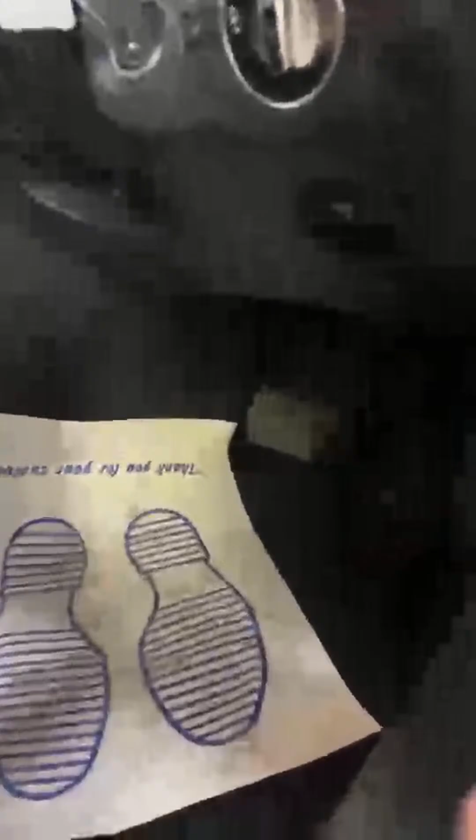Believe it or not, some people may not know how to open the bonnet on their cars. Most Mercedes are the same when it comes to opening the bonnet. I'm here in the UK, so this is a right-hand drive. To open your bonnet you go down here - although you can't see much, you can see this red lever. If you pull that down, it will open your bonnet, and most Mercedes have that, even from a year like 2002, with the same sort of red lever down there.

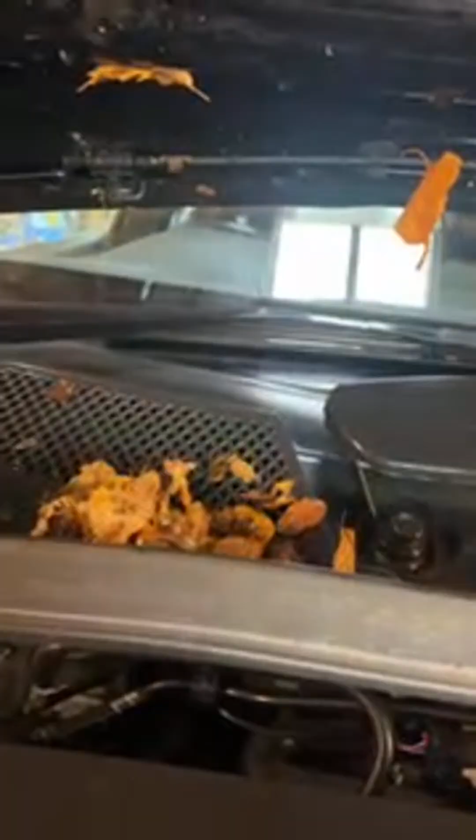Now we can go to our bonnet and check. If you put your fingers through there, there's another lever you need to flick - it's just here. That little yellow lever, you flick it to one side and then open the bonnet, and then you have the strut which you need to lift to hold the bonnet open. I'm just going to do that now. There's the strut - you have the yellow coloring there, so that's where it goes. When you put your fingers through here, that's the bit you open.

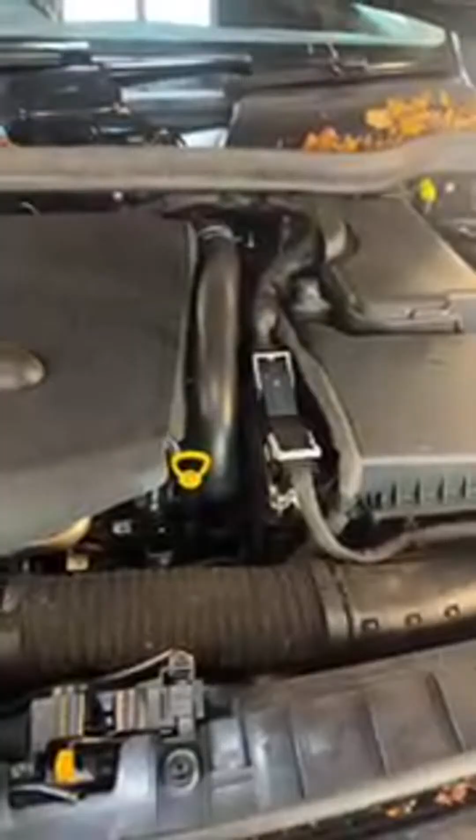It's kind of nicely color coded, and as soon as you open that, you can notice this yellow thing here - that's the dipstick, and that's how we're going to be checking the oil. So what does the manual say? It says make sure the car is on a level surface and preferably cold, because that way all the oil would have gone down overnight or over a few hours. If you have been driving the car, you can leave it parked for a few hours and then come check your oil. Not the end of the world, but preferably when it's cold.

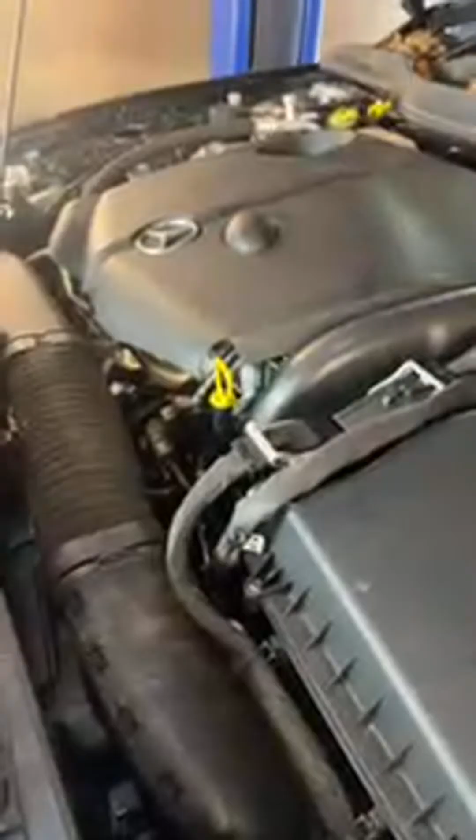So let's try and check this. I'm just going to show you the manual.

So here's the manual. It shows two models: this is for the petrol engines and this is for the diesel.

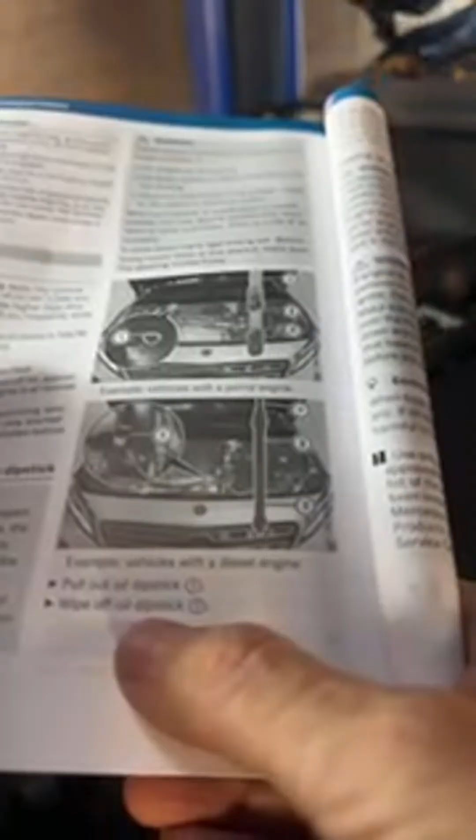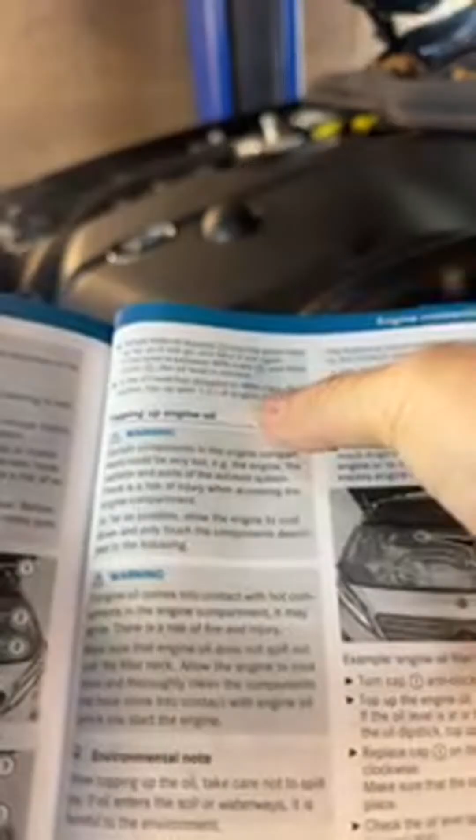The instructions say pull out the oil dipstick, wipe it off, and slowly slide it into the guide tube as far as it will go, then take it out again. If the level is between minimum mark 3 and maximum mark 2, the oil level is correct. So we have the minimum mark.

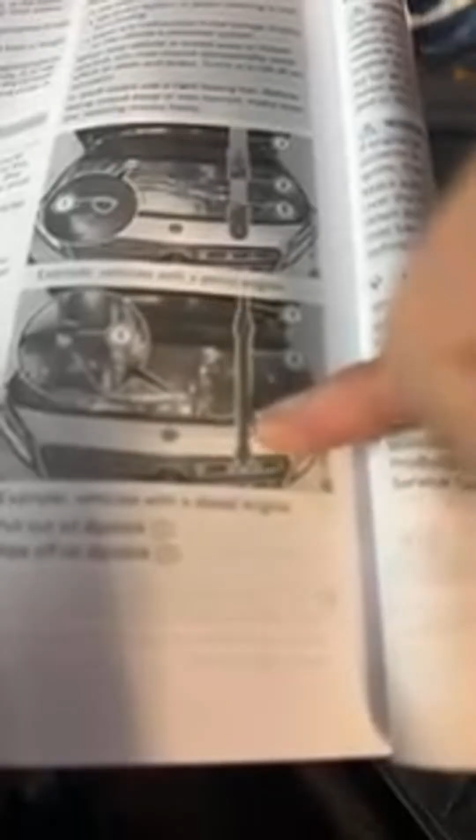In this case I have the diesel engine, so minimum mark 3 and maximum mark 2. What it's saying is that if your level is in between these two, somewhere halfway, your level will be okay. If it's down here or below, you should top up approximately a liter. Obviously if it's below, you might need a little bit more than a liter, but you can top it up until it's halfway.

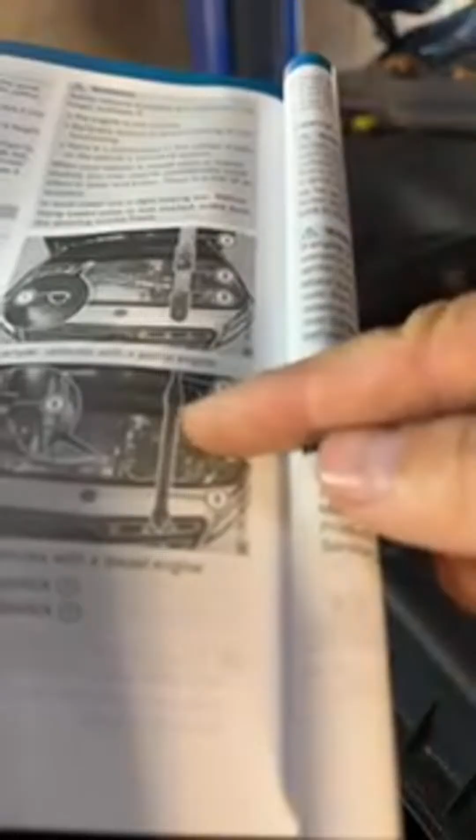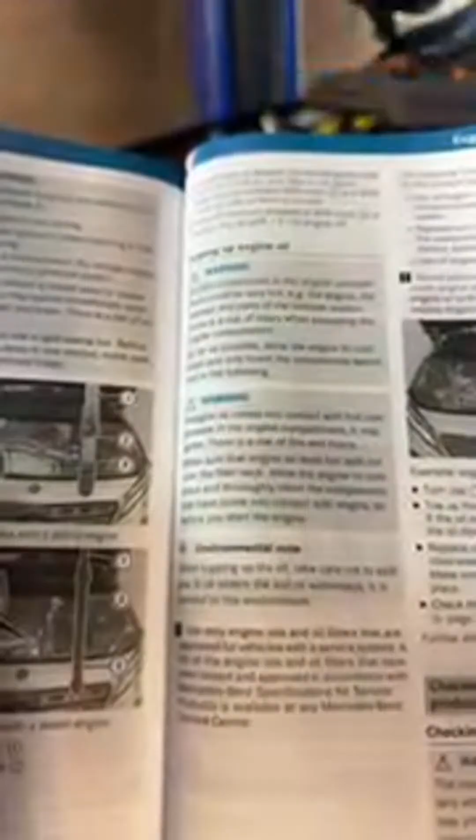In Mercedes, I actually learned this from a comment someone made, saying the oil is not usually checked up to the top mark. Halfway is usually where the top is considered to be. Having read the manual, I realized they were right. So if you fill it to the number 2 point here, it might basically be overfilled. You might get a message saying it's overfilled in the car.

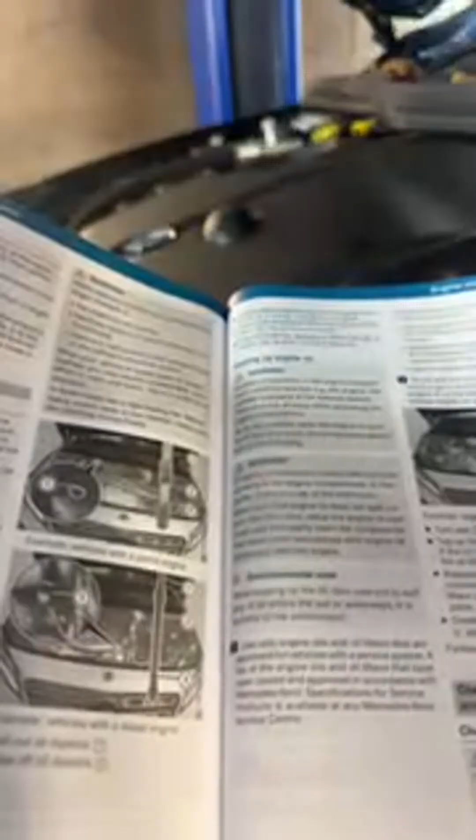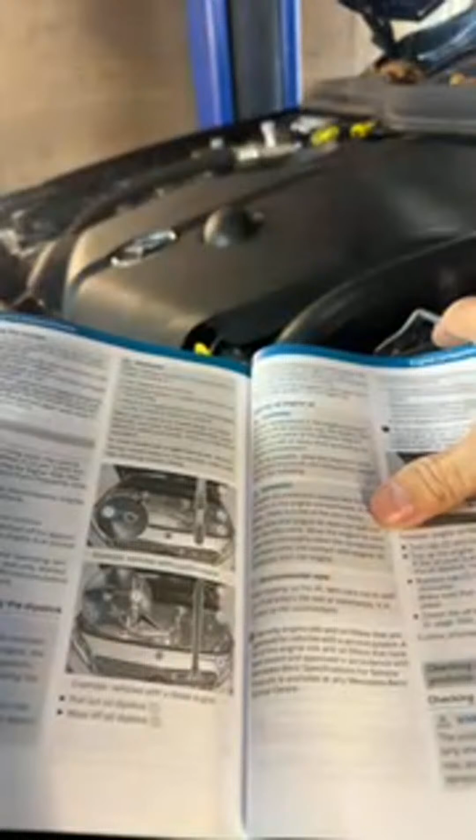So if you do have to fill or top up about a liter, there's another section that shows you what oil types you can use for diesel or petrol engines. Let me just have a look at that. This is where the oil filler cap is, by the way - we're going to have a look at that in a second. Let me check where the oil types are.

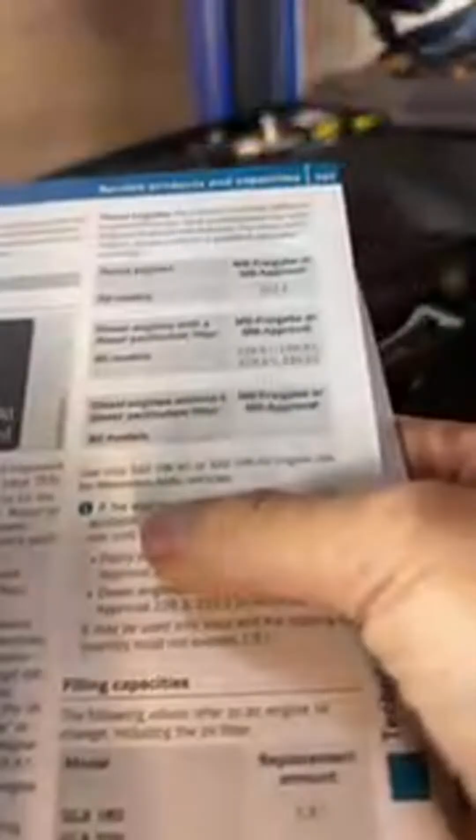Right, page 359 shows you the oil types. For petrol engines, all models, the Mercedes-Benz approval is 229.5. For diesel engines: 228.51, 229.31, 229.51, 229.52. I normally use 229.51, 5W30. It shows you here what you could use - SAE 0W40 or 5W40 for AMG vehicles.

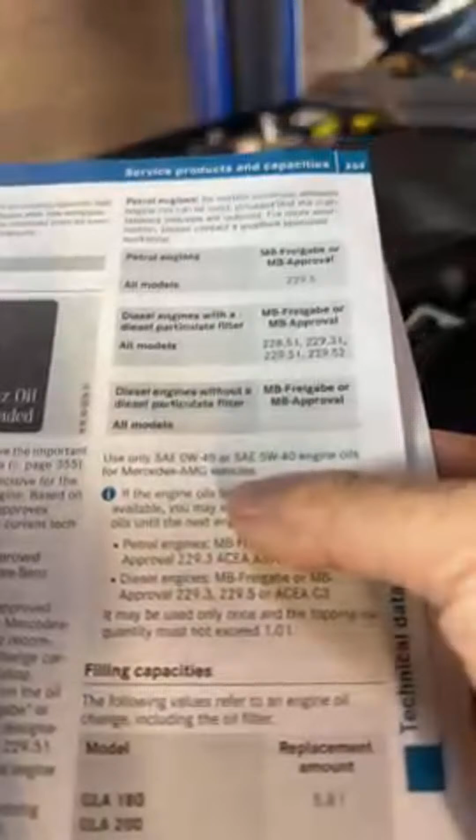And also you have another oil recommendation here.

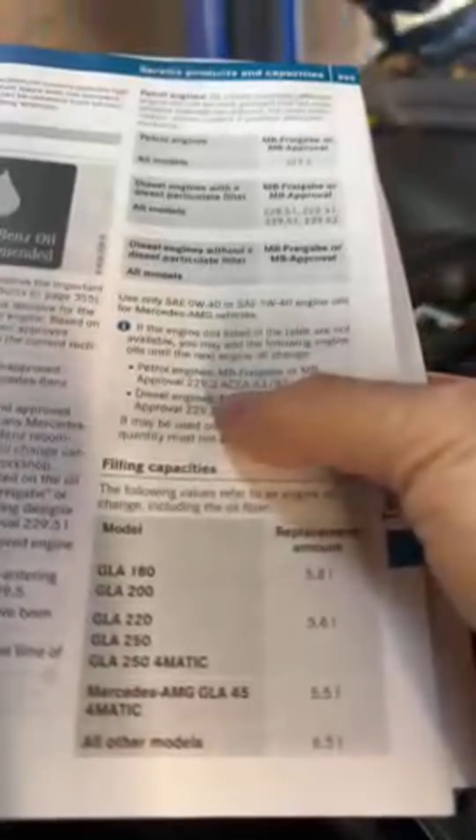So for petrol engines it's 229.3 ACEA A3B3, and for diesel engines ACEA C3, so 229.3, 229.5. And you have the capacities here that you would use if you were doing an oil change.

So we're doing a level check. We know what to look for now. So I'm going to remove the dipstick and wipe it.

Oh, you're watching from Kansas City. What time is it over there? It's 11 o'clock in the morning here. Thanks for watching, by the way.

Okay, let's take this dipstick out. I'm going to wipe it. Maybe wear some gloves if you have some, so you don't contaminate your hands.

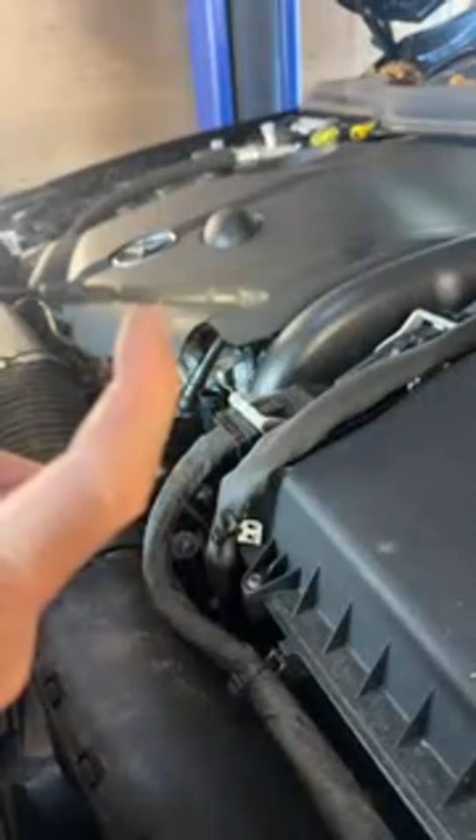So these are the levels. You will be able to see it says min there, min and max here, and we're expecting the oil to be here, halfway. So that's nice and clean.

Dipstick - okay, put it back in, take it out. I can see my oil is at the minimum in this one. You can see the dark area there. Mine is at the minimum.

So the manual also says that the car...

Go to sleep. Bye, George.

What was I saying? The manual says the engine can burn up to 0.8 of a liter per 1,000 kilometers. That's quite a lot, to be fair. But I did see that somewhere - if I can find it, I can show you.

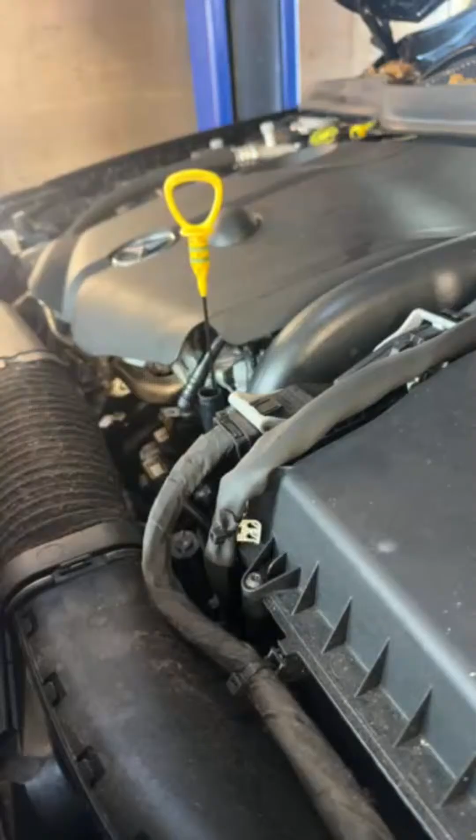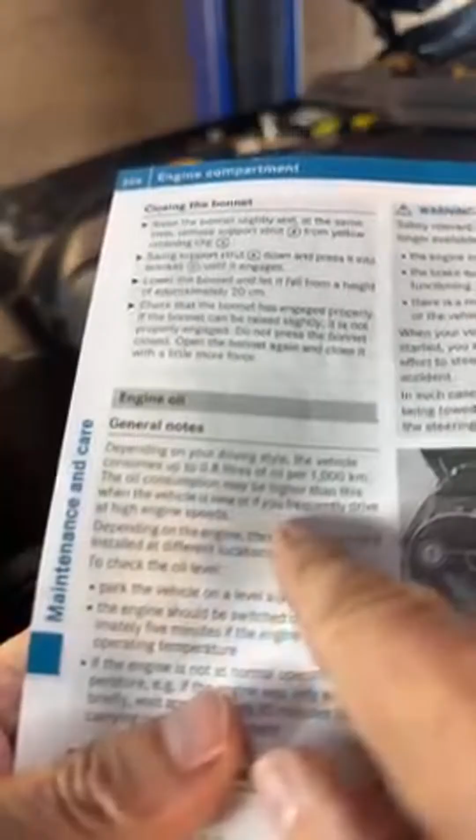Right, don't know if you can see that, but depending on your driving style, the vehicle consumes up to 0.8 liters of oil per 1,000 kilometers. The oil consumption may be higher than this when the vehicle is new or if you frequently drive at high engine speeds. That really is a lot, isn't it?

So that's why it's important to check the oil level, so we can keep it topped up and not have any dramas, because we want to look after the car, specifically the engine.

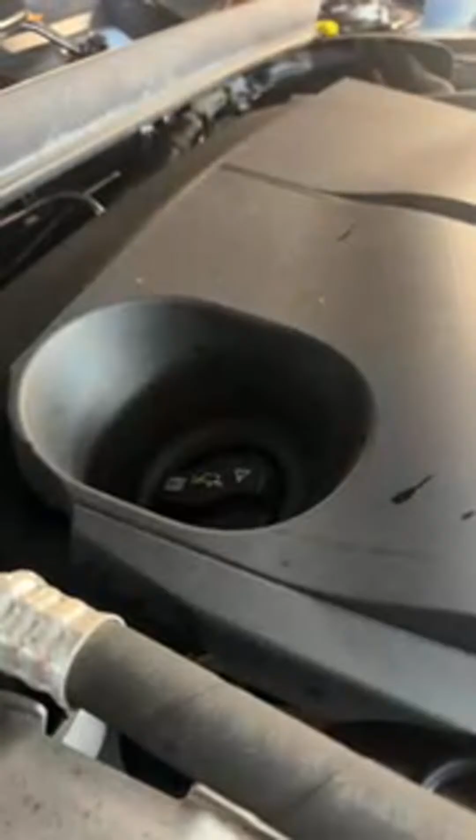Right, let's go and top up some oil. So that goes there. And I want to... I think I did.

I'm just getting some gloves on so I don't get oil on my hands. I would recommend that. I'll add a link if I...

These oil caps can sometimes be really hard to open, by the way. So sometimes I use a pair of pliers and just grab it so I can twist it, unless you're very strong.

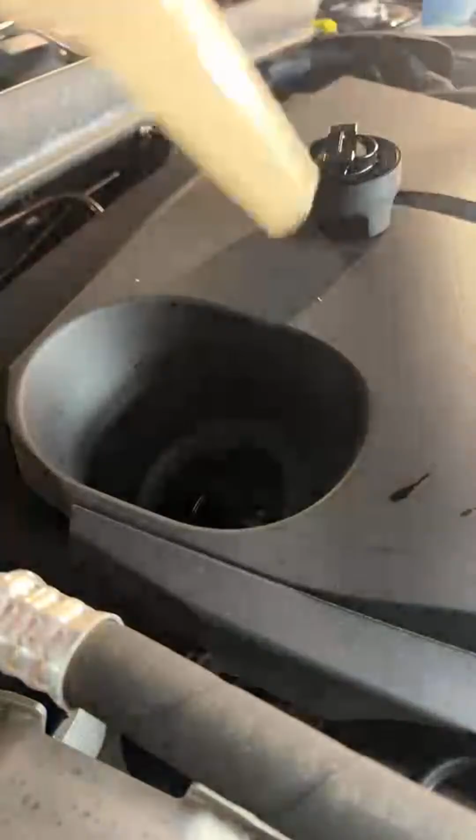So I'm going to top up about... I've got 800 mils measured in my can here, even though the manual recommends a liter if it's at the minimum, but I just want to check and show you.

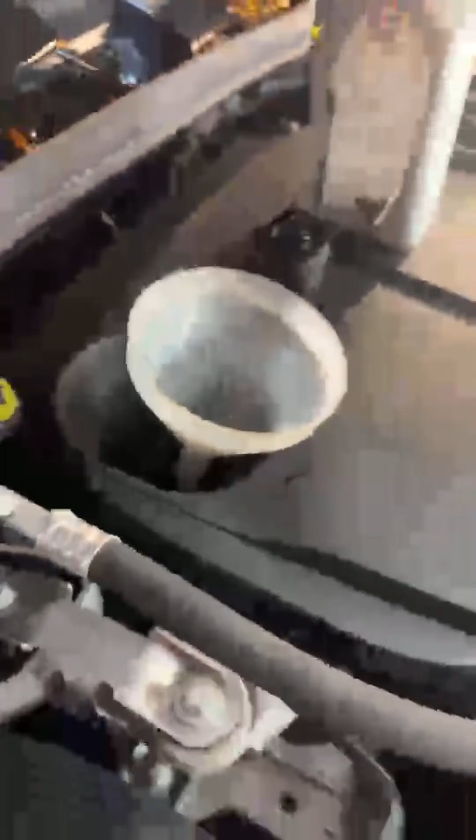So obviously when you top up, we'll have to wait a bit for the oil to drain down. And obviously the longer you wait, the more accurate of a reading you can have. And if you're impatient like me, then you don't wait too long. No, I'm just kidding. I'm very patient usually, but we're just trying to get this done so we can move on to topping up some screen wash fluid and checking the coolant as well. Right, that's nice and clean.

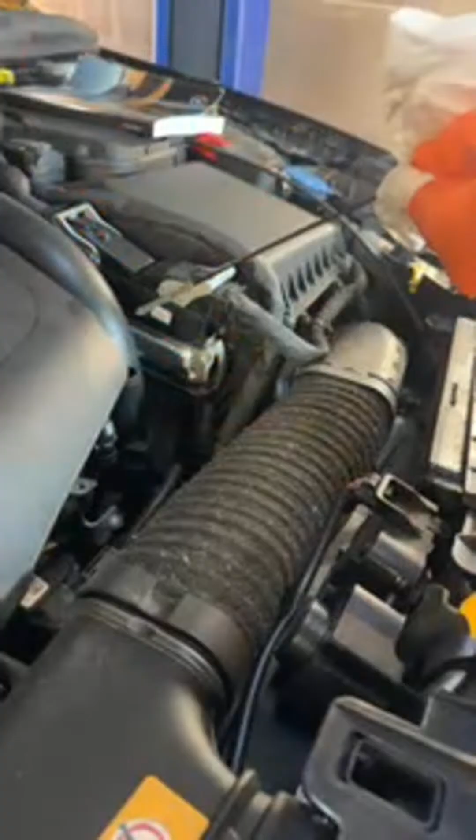Put it all the way down, take it out again. And you may be able to see it's gone up to halfway, maybe a little bit less than halfway. But it's gone up a bit. I guess it depends which angle you see it from, but you can see the difference - it was down there, now it's just there. So I got 800 mils in there.

And to me, it looks okay now. So although they do recommend 1 liter if it's at the minimum, we could go ahead and put 1 liter. It wouldn't be any harm, but since I put 800 mils, I think I'm gonna leave it there for now and drive it, because they are very sensitive.

I had another car, another Mercedes, that had a little bit more than half, and it was giving me the message to drain some. Having that message means you have to drain a little bit, and unless you have an electric pump to drain some oil, otherwise you have to drain it from underneath. But when you remove the bolt underneath, the pressure sometimes doesn't let you put it back on, and it all gets messy.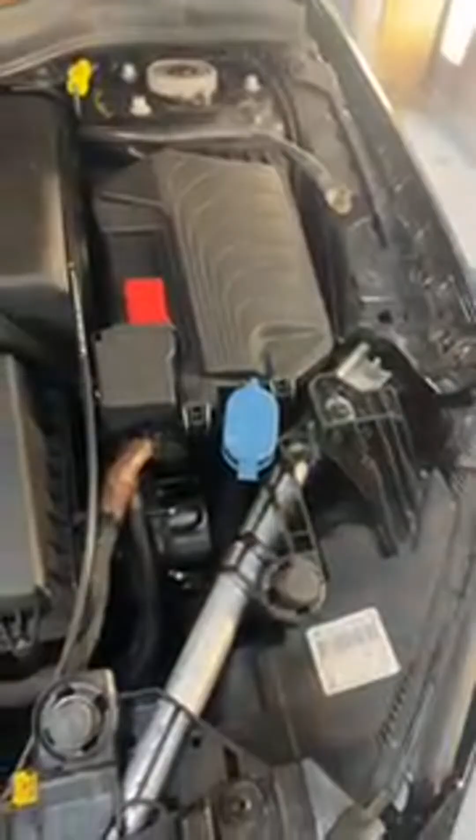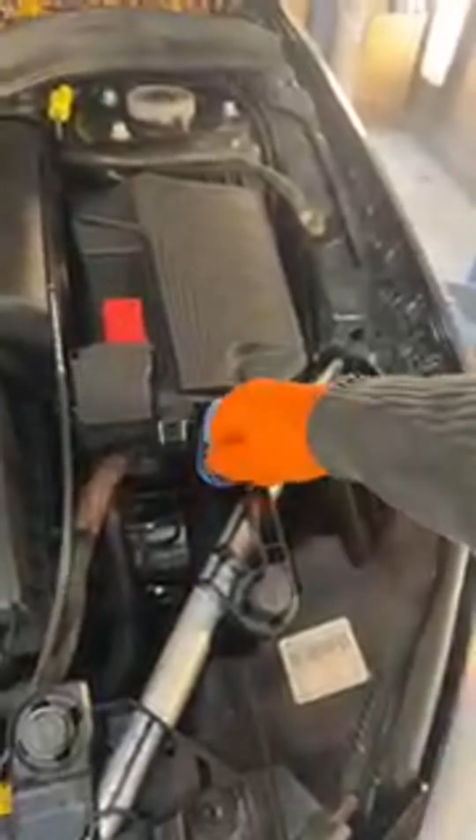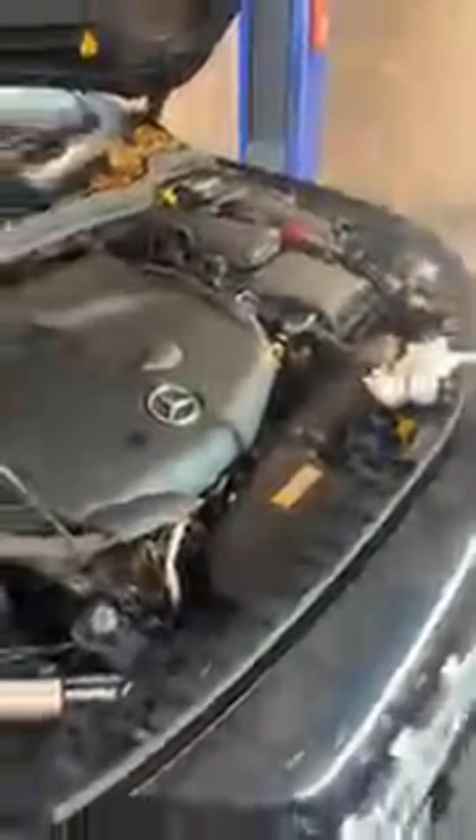So screen wash fluid in this car goes in here. Oh, you saw that video? Yeah, that was that Mini Countryman, and a lot of, well, all the Mini Cooper models, all the way from 2005 or 2006, they all have that very similar engine, which is the Peugeot one. It does burn oil. Everybody likes a Mini - not that they are as mini as the original Minis from the 70s, they were really mini, but the later Minis are quite nice, I must admit. But they do have that engine that really loves oil. As long as you check the oil and keep it topped up, it's quite a good car.

Right, screen wash fluid. I don't know if you guys, well here in the UK we had some news the other day that hundreds of these containers are being shipped all around the country, ready mixed. Basically what they were saying is that they are shipping loads of these which are ready mixed, meaning they are just carrying water all around the country. So it's best to buy the concentrated version and mix it yourself, because you have water at home, so you can use the water at home rather than shipping hundreds of these where they have a little bit of fluid and then water. Anyway, you can see it as you would like to see it, but maybe it does make sense.

I normally buy the concentrated one because I'm always working with cars, so I mix it myself, and it works out a bit cheaper. But definitely use the proper fluid, because if you just use water, then in the winter it freezes and can expand, crack your tank, and it's not going to come out the jets - even though some jets have heated heads, so the little heads of the jets are heated and can dissolve the water, but that's only for the water at the tip of the jet. The rest of the water in the pipes will be frozen. So if you use the original stuff, this is rated up to -20, and if you're in the North Pole or somewhere very cold, you may need a stronger mix.

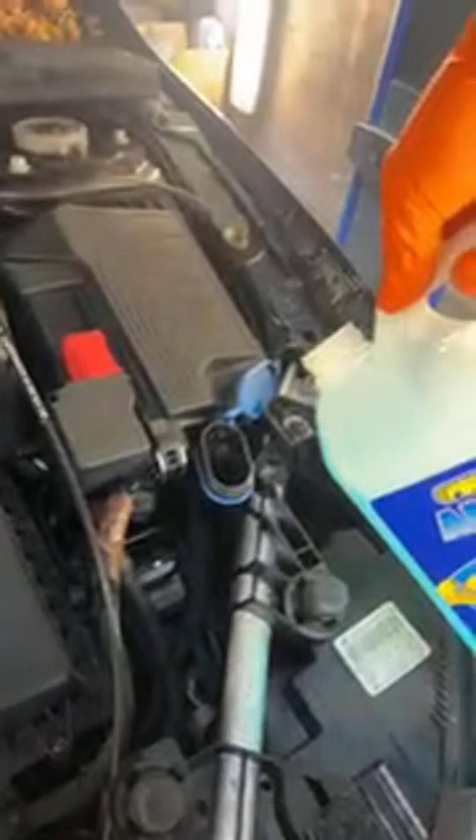And then we can top this up. Mine was actually topped up not long ago, so just for the purpose of the video, that's where it goes. But you can see that it was full.

And again, if you put water in there with washing up liquid, it just becomes a very foamy mess. So don't do that, not a good idea.

And that's it. Once you have one of these mixed, you can put it in the boot luggage compartment and always have it there, because that fluid runs out quickly, especially in winter. So that was easy enough.

Oh, you had several of the original minis. Oh, they were nice, isn't it? It's so hard to come by an original mini nowadays. It's almost impossible, or you have to pay a lot of money to buy one.

Oh, I can imagine. Wait, -35? Blimey. Okay, you would need a lot of concentrated fluid.

That is pretty cold. Here in the UK I don't think we have had -10 degrees maybe at some point. -35, wow, that's deadly cold, isn't it? Don't know how they survive in the northern or southern places where it's -50, -60, I don't know. Extremely cold, don't think I could do it.

Right, let's move on to the coolant. The coolant in this car is sitting in this tank. Now since you are checking all your fluids and levels and whatnot, and the car is cold, we can safely open this cap. If your car is hot, you've been driving it, just don't open this cap, because you can get extremely hot water coming out of there and burning you pretty badly.

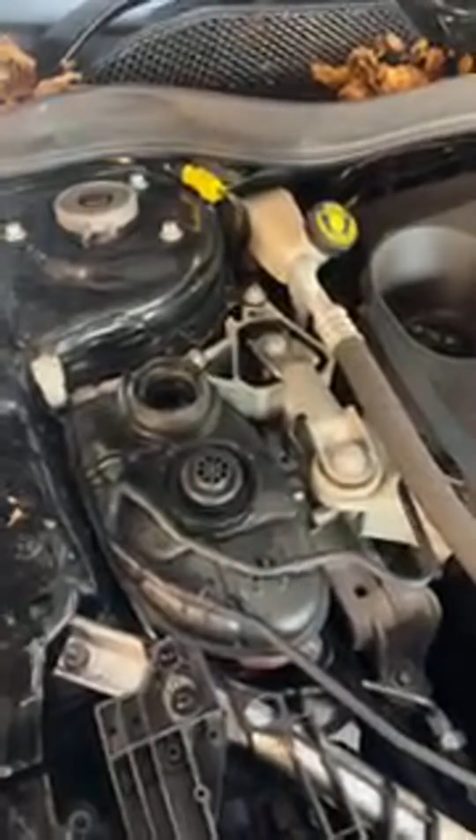Yeah, some cold winters in London, but in the past few years it has been getting less and less. Well, it's been warmer and warmer, isn't it? Or sort of changing a little bit. It's getting colder in the southern hemisphere of the world, and it's getting warmer in the northern area of the world.

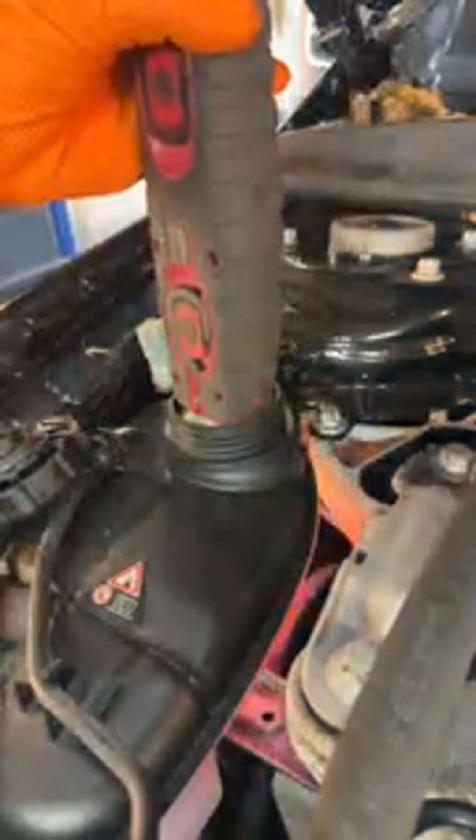Okay, our coolant is in this tank, and if you shine a torch on the side of the tank, I'm just going to show you, you can see an orange color. Right, can't hold that. Okay, there. You can see this orange color, and if there wasn't any fluid in here, this would look just clear, just white.

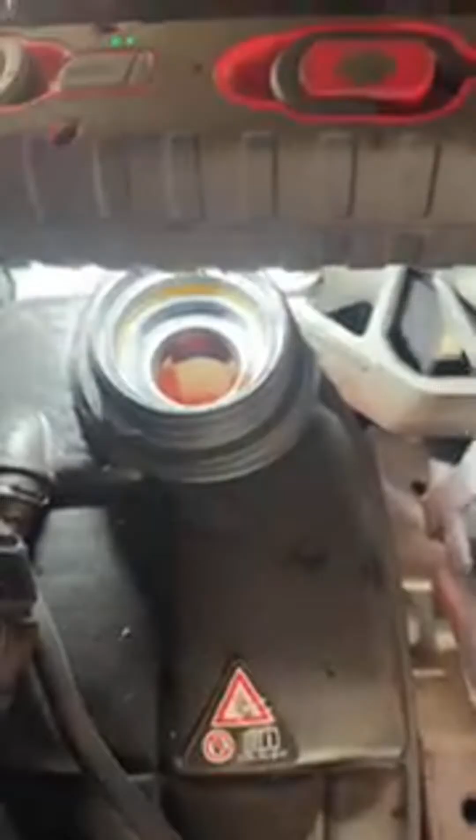So I can already tell there is coolant in this tank, and I'm aiming to check that it's up to this sort of area here. So I can definitely see it's up to this area. And then if you look in there, you can see the coolant.

So you can see that coolant is orange in color, and now I'm going to use a little gadget to measure the actual percentage of coolant that is in that tank. I'm using this device.

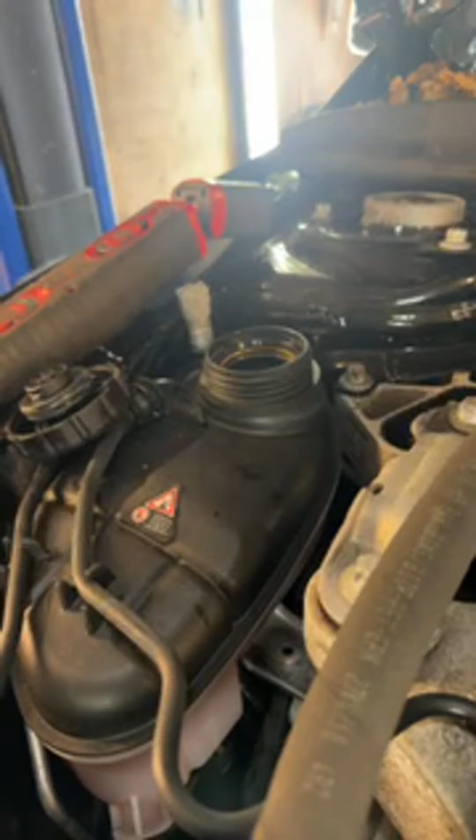I think the coolant on this car was replaced 3 years ago. I think the manual recommends changing it every 2 years. Not that I've seen many people doing that.

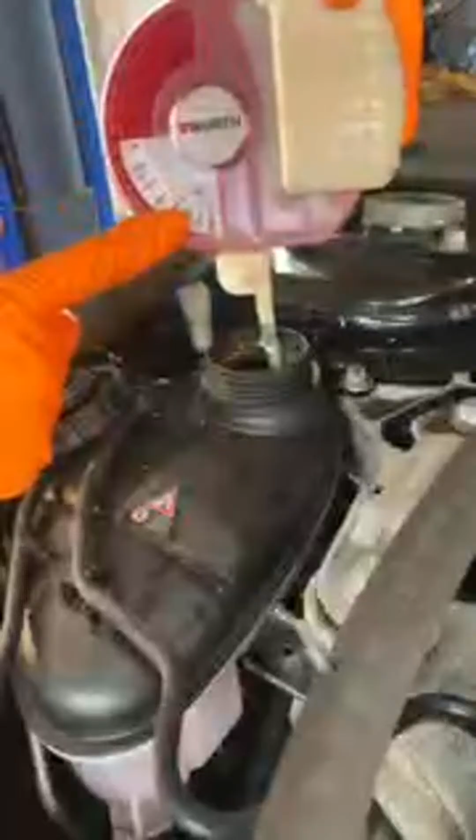Right, I've got the gadget, the Würth. This will tell us at what point this coolant can freeze. So I'm just going to suck some of that coolant into here, close that valve, and we're going to let it settle a little bit. And it's sort of settling around -35, -40.

Sorry, I've got someone visiting. I may have to leave soon. So anyway, as I was doing here, right.

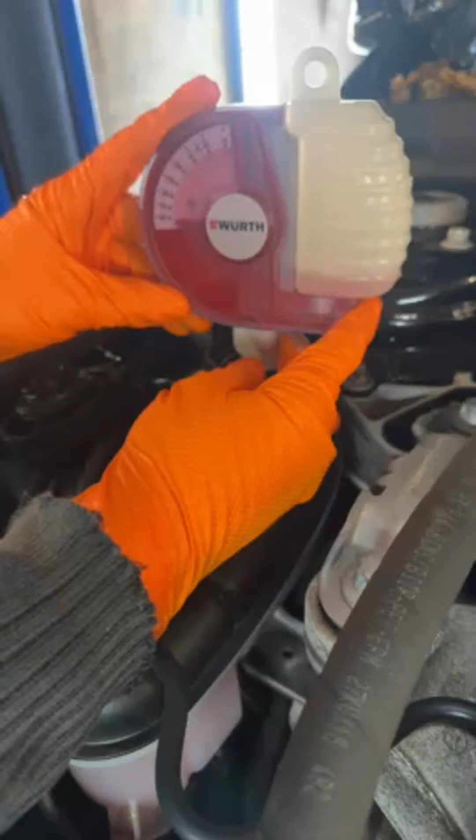Let's check this again. Right, so the needle is settling at about -40 right there. So -40 is good, I'm happy with that. There's a lot of devices out there that can measure coolant, by the way.

So I'm actually happy with that. I'm happy with the level, I'm happy with the percentage of antifreeze. And again, it's very important to have antifreeze in there because antifreeze has certain agents and minerals that protect the engine from corrosion.

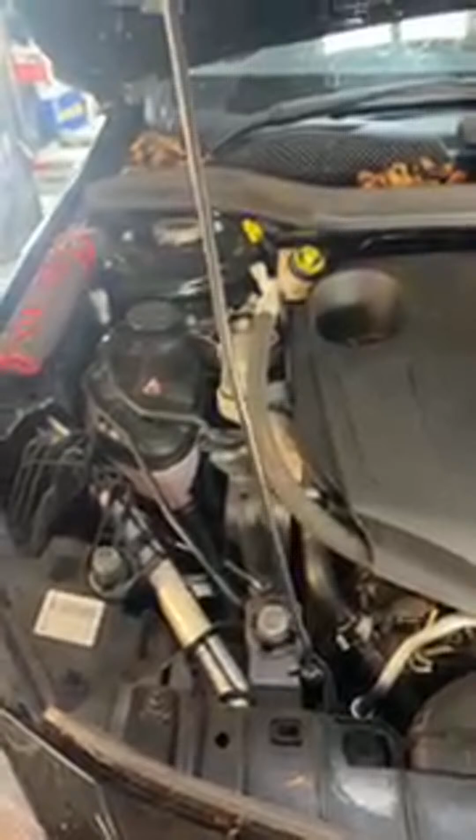So again, if you only put water in there, if you had a tank just with water, that means your engine has got only water. In winter it can freeze, and it can actually damage your water pump and your engine in general. So make sure you have antifreeze. And it doesn't matter if you're in the North Pole or you're in the Sahara Desert, it's going to be a necessity. You need to have some level of coolant to protect your engine.

Sorry, I just had a question there about brake fluid, which is a good point. The brake fluid in this car is actually in here, and again, if you shine a light to it, you can see it better. It's that yellow there.

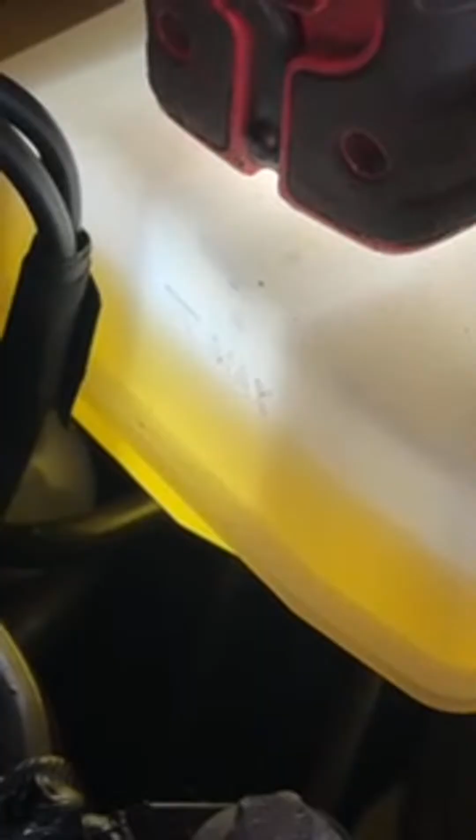You can see the yellow around here, and you do have a max mark just there, if you can see that. So this is sitting a little bit below the max. So this is a 2018 Mercedes.

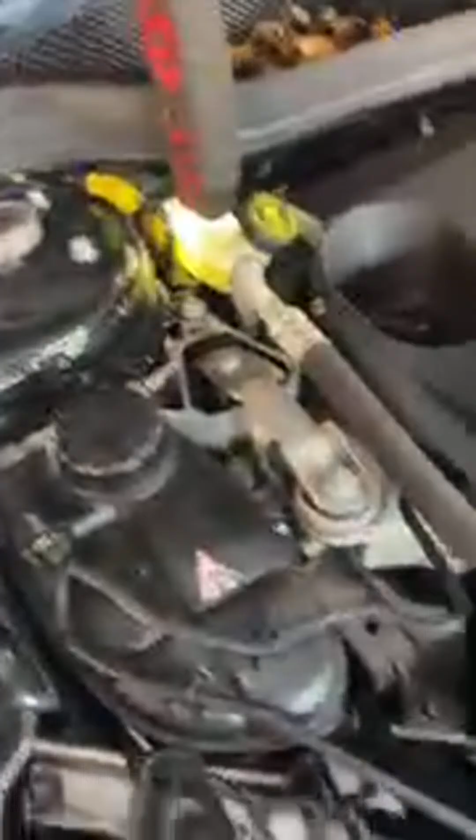Now there is a gadget to check your brake fluid, which I happen to have somewhere here. Let me see. I haven't used it for a while, I don't know if it's working.

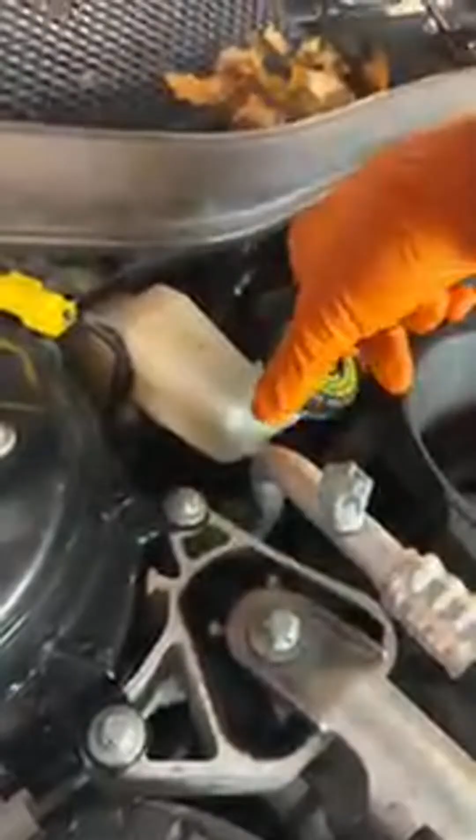So it sort of tells you how dirty your brake fluid is. And again, they do recommend changing the brake fluid every 2 years. So you get that, and we know the level is good. We can allow it to be a little bit lower than the max. That's not an issue, because as the brake pads wear down, the fluid goes down.

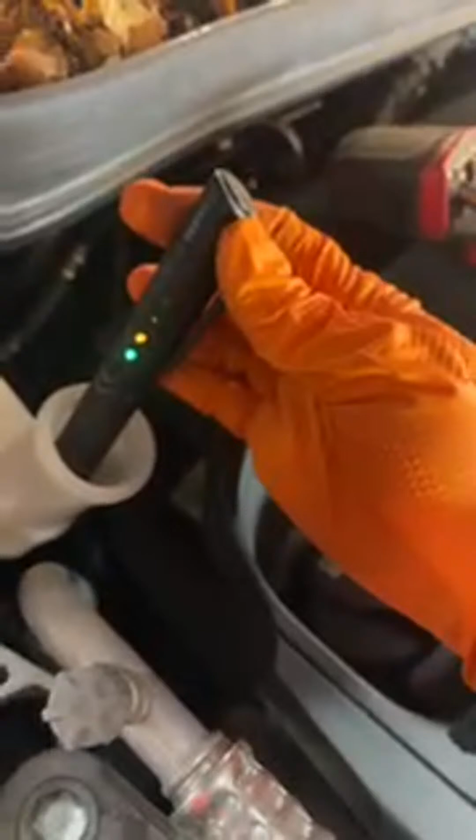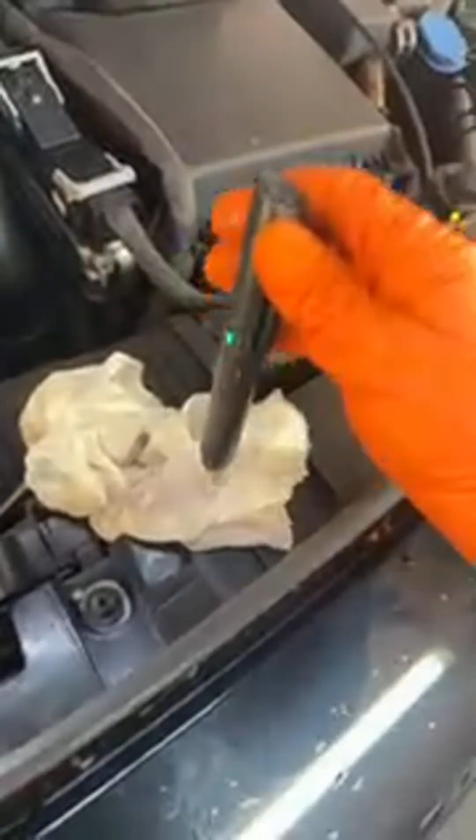Right, I'm not sure I can, oh yeah, I could. So if I switch this on and I put it in there, you can see the little yellow light that's come on there. Don't let that fluid drip onto your paintwork, by the way, because it will strip it.

So what it says there is that in this area here, your brake fluid is okay. It says it's okay if it's in this area, so it's less than 1% contaminated basically. Then you have the second light here at 2%, 3 and 4. If you're in the 3 and 4, you want to change that brake fluid, have it bled and replaced and whatnot.

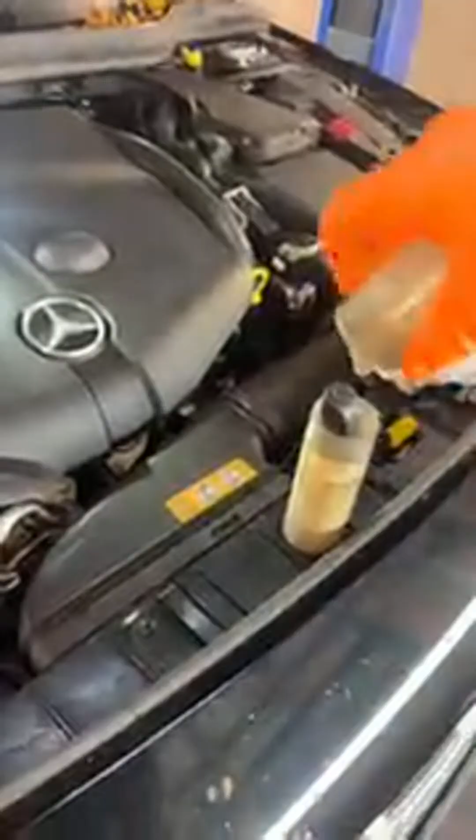So it's a handy little gadget, because a lot of people don't really do a brake fluid change. So this one is good. Thanks for reminding me of that, by the way. I haven't used this little thing in a while, but we usually do a brake fluid change.

And let's not forget to put that little cap back in there, and close that. This car has an electric power steering motor, so there's no fluid in this model. A lot of the newer Mercedes and BMWs and many cars now have electric power steering, so they don't have fluid, they don't have a reservoir.

I think next time I should check up my Mercedes 190E, which is the old-fashioned one, so we can check that out. I also have a BMW E36, 1992, which definitely has power steering fluid and whatnot. I need to get that out, it's been stuck in a garage for years and it needs to come out.

At one point, no, this is the 200 diesel, it's a 2-liter diesel. Looks like the W246, kind of looks a little bit like that, I suppose, but let me show you here. The GLA 200D.

So I think with that, we've covered all the fluids here. Now, one last thing I wanted to show you was the tires. So have a look, have an inspection of your tire. Sometimes you can see little bubbles that come up, or bulges that come out. If you have something like that, you want to replace that tire. Also have a look at the tread.

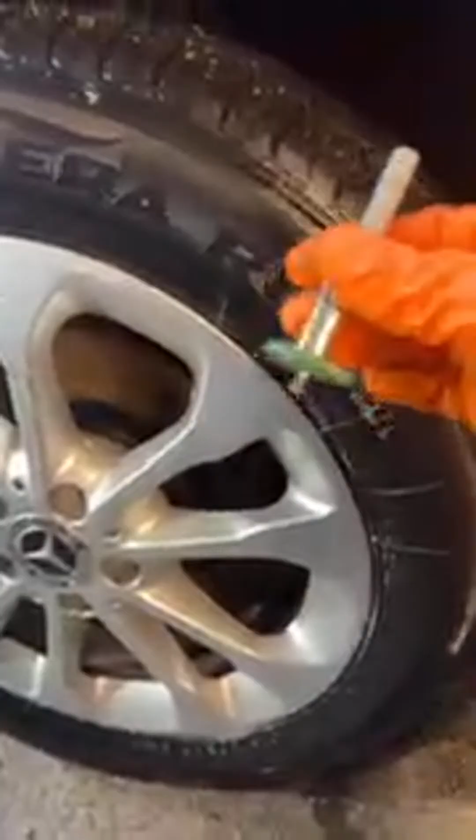You can use one of these little things to check the tread. So that one's got nearly 7 mils of tread. It's quite a new tire, to be fair. You can do the same with all your tires, check for bulges and whatnot. Yeah, this tire has been replaced recently.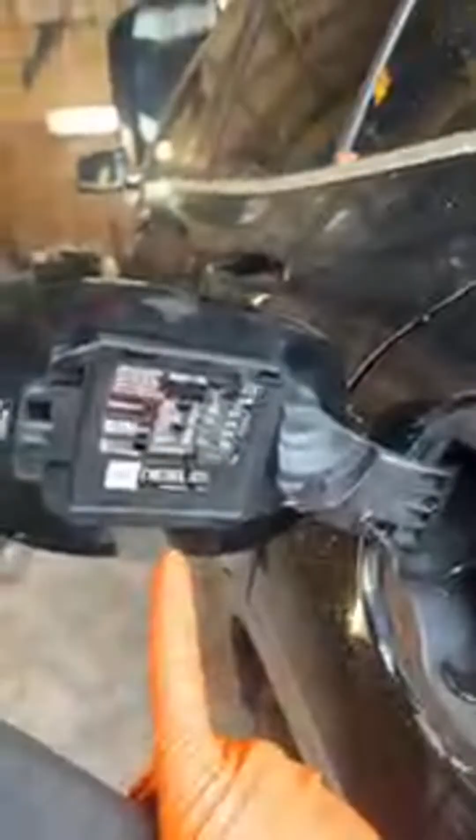Now I'm going to show you the tire pressures. If we go around the back, let me see if it's in here. Right, in the fuel cap here, you will find the recommended tire pressures for your car, depending on the size of your wheel and tire.

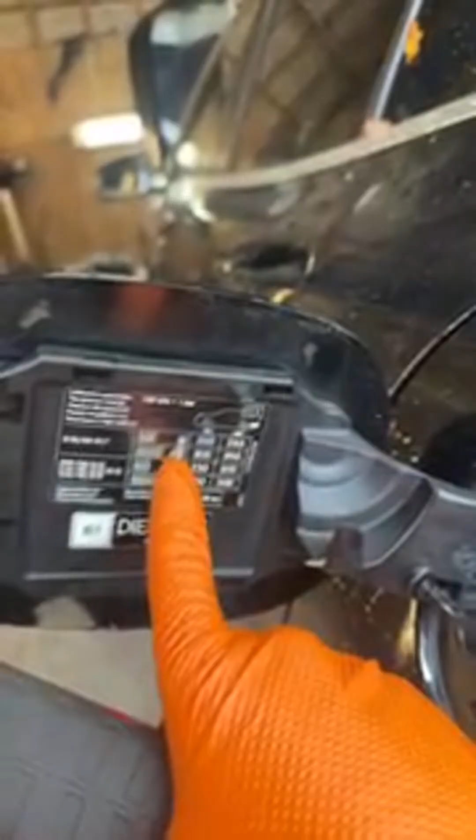If you have a 215 60R17, you are going to look at this part here. So if you're carrying 3 people and a little bit of luggage, or yourself and whatnot, they recommend 250 kilopascals for the front, 250 for the back. If you're carrying more people and more luggage, heavier car, 300 and 300. 250 is 2.5 bar, 2.5 bar. This is 3 bar.

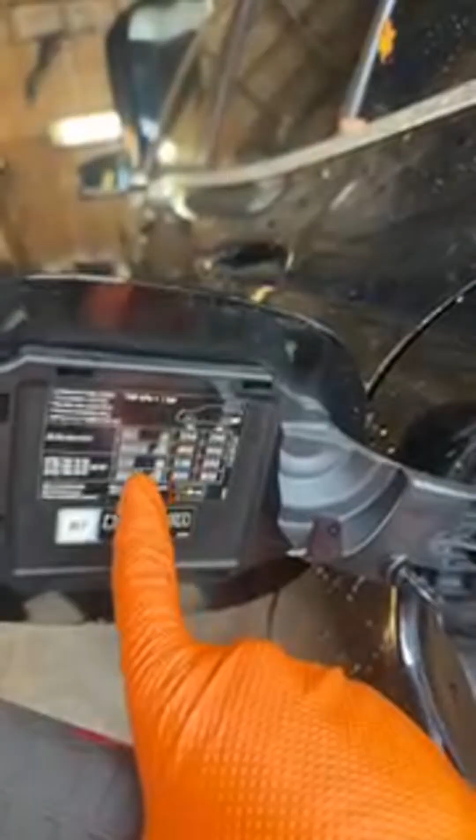And if you have a bigger tire, 235, like an 18-inch rim or 19, then you use these recommendations: 230 for the front, 200 for the back, and 300 if you have more heavy weight. You can find the tire size on the wall of the tire. This one is a, what is it, a 215 60R17.

I've noticed that some vehicles go from a new system back to the old system because the electric power steering has had some issues. I haven't had one in a Mercedes, but I have had issues in the BMW E90s. They have suffered with electric power steering issues, but not that bad, to be honest.

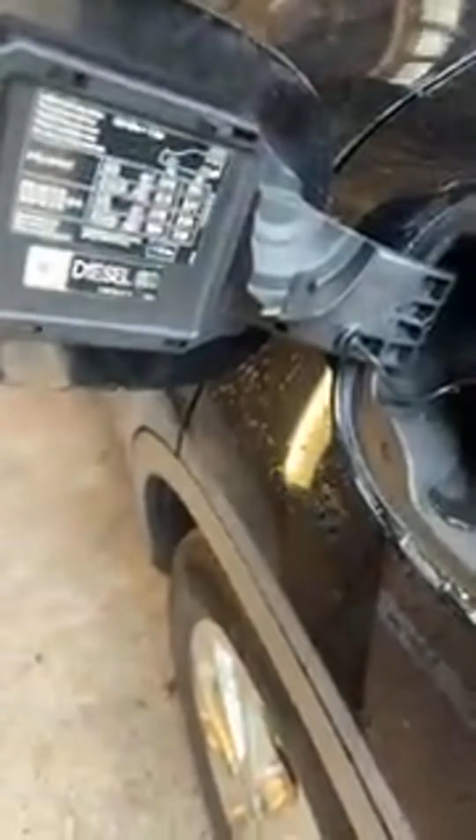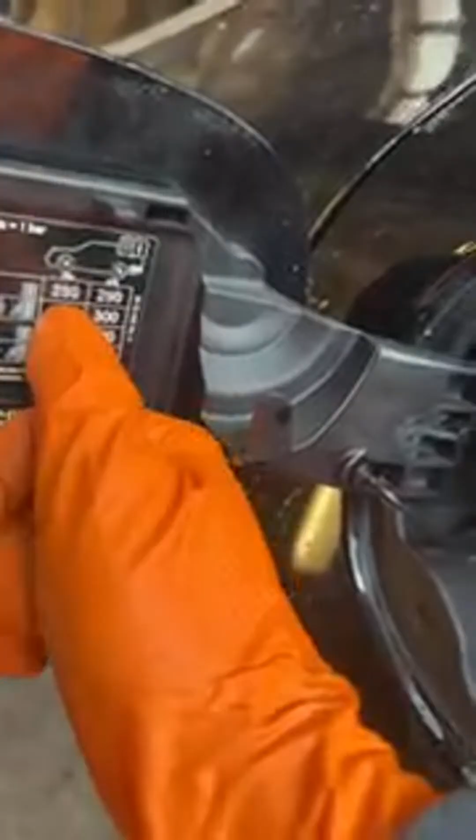So I have a 215 6017. I've got the one up here, 215 6017. And I would put, this car is usually empty, so 250, 250. That was 2.5 bar and 2.5 bar.

No, I didn't actually check the battery. It's a good idea as well. Thanks for the tip. Let me check what 2.5 bar is in PSI.

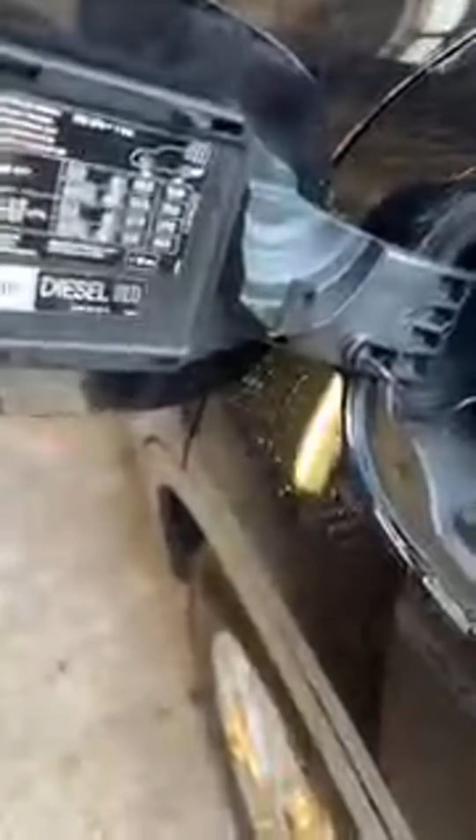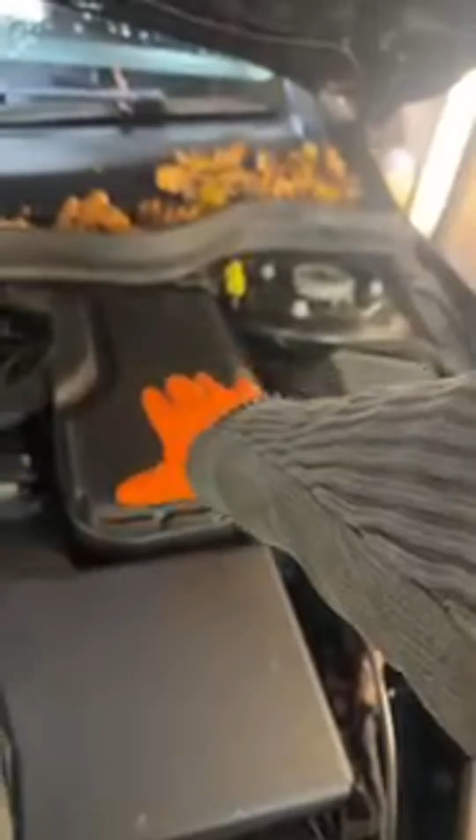And battery, that was a good point. So the battery voltage, you can check if you have the tools really. The battery goes here. It is a little bit awkward to get into that battery, but we could either use the direct battery terminals, or we could use the jump start terminals, but there might be some resistance loss if you check it through the jump start terminals here.

Let me see if I can remove this. I have removed this before, but don't want to break anything just now since I'm playing with one hand. But if you have a multimeter or a battery checker, I'm just going to bring the one I have and I'll show you what it looks like.

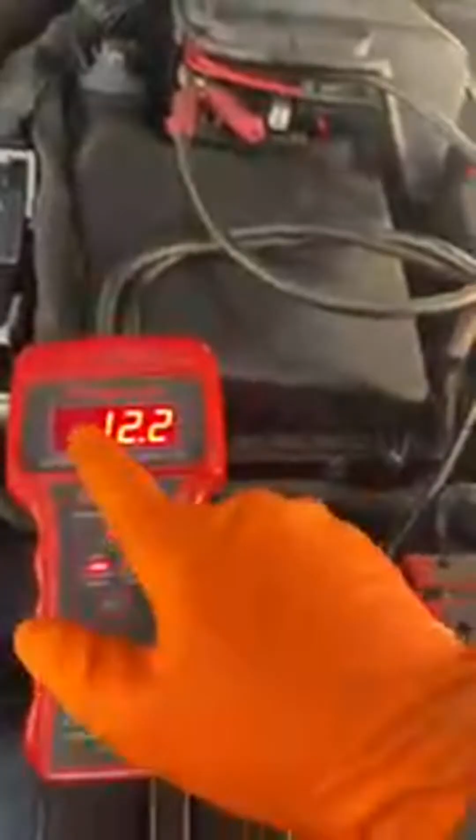Okay, just managed to get that up a little bit so it slides towards yourself, and then we lift it up a little bit. So I just connected my device. This is a Snap-on, showing 12.2 volts. If we do a test of it, it gives us the battery life. So at the moment the battery life is showing to be good.

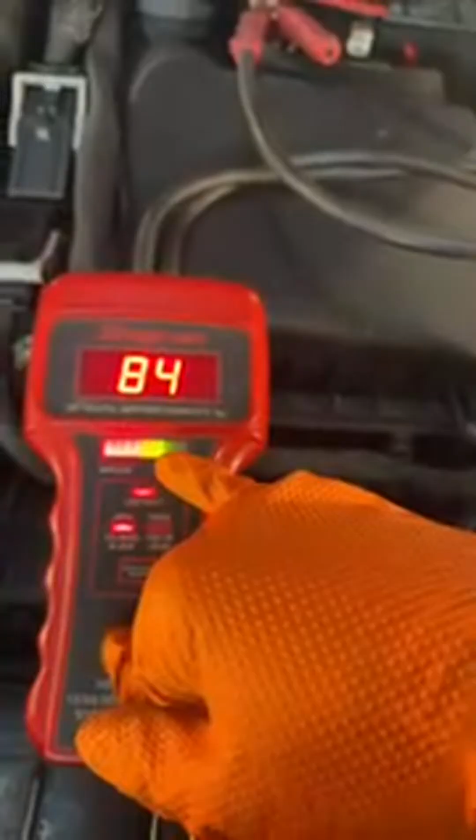Now a lot of these batteries on these newer cars have this AGM technology for start stop, so the batteries are quite powerful. So anyway, we have a good battery, but this is the device I usually use for checking that kind of thing.

Right, let me try and fit this back.

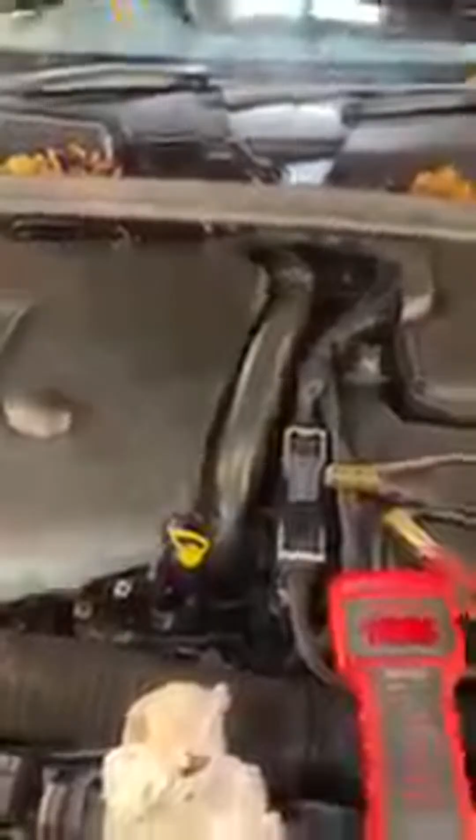Brilliant, but I think we're mainly doing the basic checks - these are a little bit more in-depth, but basic checks for the average person that's just going to drive every day. I would say coolant, screen wash fluid, oil level may be quite important. And that's a good point - lights, should check the lights, brake lights, side lights, indicator bulbs, all that kind of thing.

And I'm going to have to be going soon because I need to do a service on another car. It's a Mini Clubman, and it also needs some preparation, as it's for sale at the moment. So I have a busy afternoon, but I wanted to cover these points here.

If your battery was below 12 volts, does it need replacement? It might do. I mean, to be honest, if you drive it every day and it's showing below 12 volts, then it is on its way out. But if you don't drive it very often, just once in a while, then it may just need a bit of driving. Oh, no worries, mate.

We'll catch up on the next live that I do. I might be doing another one of these on a different model. We might use the BMW E90 I have here, which is an older one, and we could check that out. I do have a Nissan as well. There's a few cars that I can do just to cover a number of cars, and obviously different people own different cars.